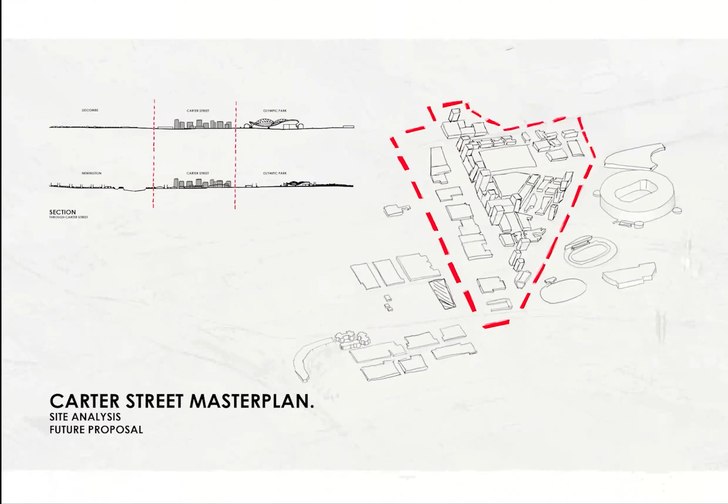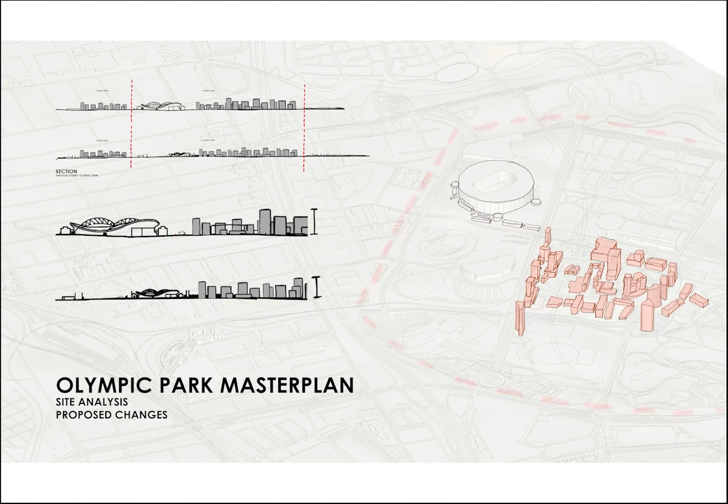Plans for Lidcombe's development cover an area of private residential growth as well as diversification into high technology manufacturing. Carter Precinct, however, focuses more on high-density, high-rise residential, breaking the form factor and level changes to Lidcombe. Olympic Park's repeating vernacular in high-rises further creates a rift between the three precincts as boundaries are formed. Lidcombe's typology to Olympic Park demonstrates a transition between two fundamentally different experiences.

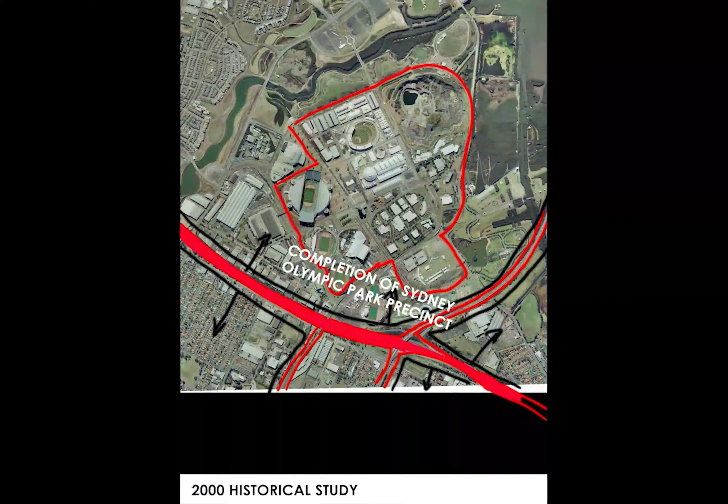Across the last 100 years, the WestConnex construction has been a driving force in the disconnect, most prominent between the suburbs. What remains as heritage for both communities documents a disparity in culture and historical use. The households, occupations and age group between precincts vary, with Lidcombe having an aging population compared to Olympic Park.

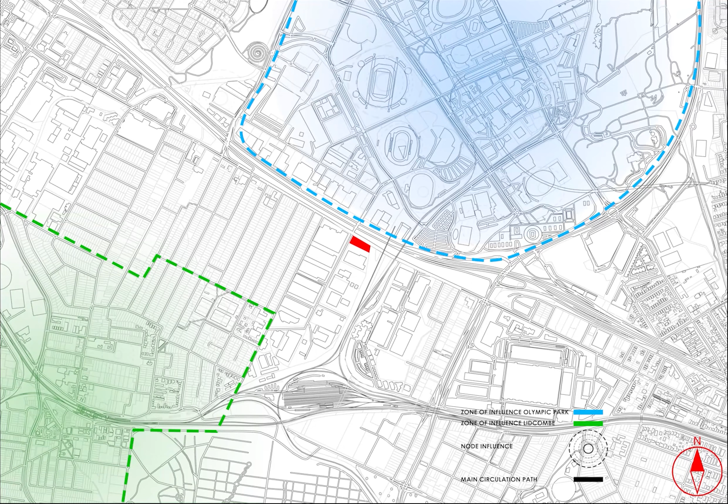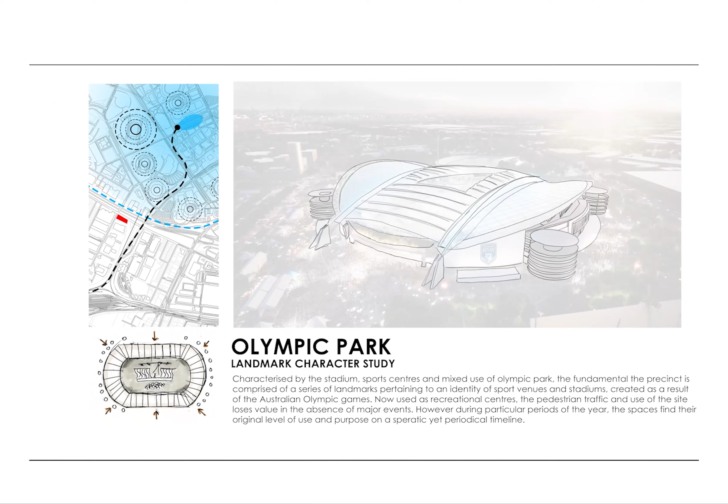Our site is essentially a gateway between two boundaries created by two heavy nodes of circulation and activity. Lidcombe Station is the starting point that funnels circulation from both suburbs it separates. The plans for the revitalised Wyatt M. Phillips Park act as a node of social activity meant to congregate citizens of Lidcombe. Olympic Park Stadium finds varying levels of social activity based on scheduling and events, but altogether is a large place of gathering. In contrast, Olympic Park Station is the ending point of a node that physically affects the site minimally as it disperses circulation around it.

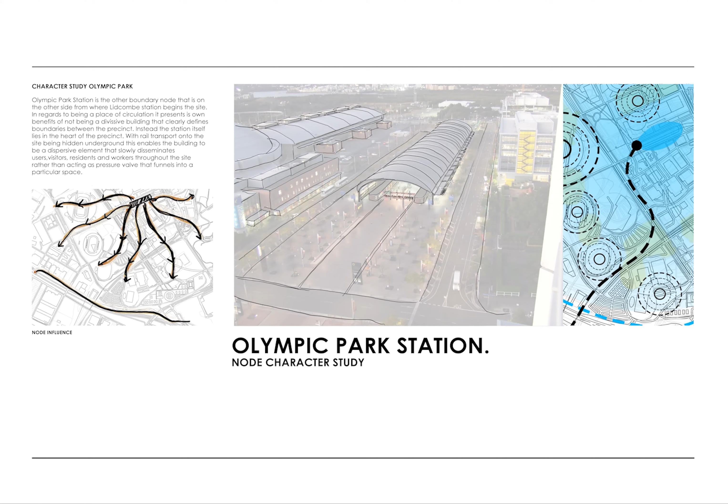The site's issues with boundary conditions are similar to the ICC's public domain interaction with Tumbalong Park. With a circular park space, each building must adhere their facing facades with a greater purpose of creating a gateway between the boundaries of two highly populated high-rise areas.

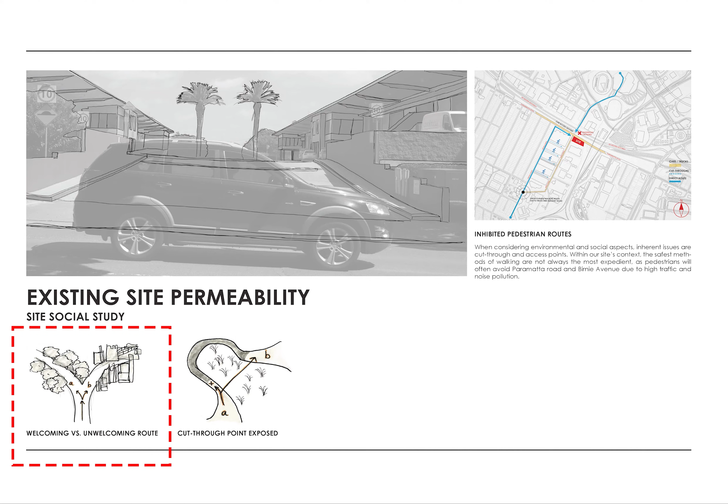When considering environmental and social aspects, inherent issues are cut through and access points. Within our site's context, the safest methods of walking are not always the most expedient, as pedestrians will often avoid Parramatta Road and Birnie Avenue due to high traffic and noise pollution. Such issues create a problem which may result in people avoiding the site altogether. Instead, the opening of the Pippita Rail Trail, combined with the proposed bike path through Bachell Avenue, will offer pedestrians and cyclists a safe and expedient gateway in accessing the site.

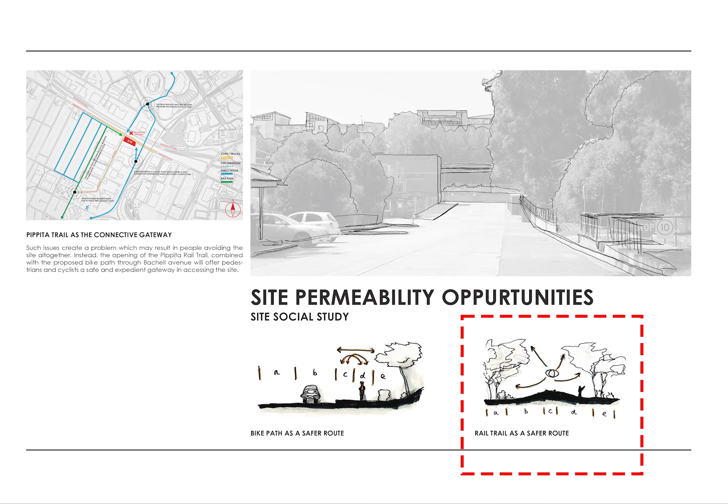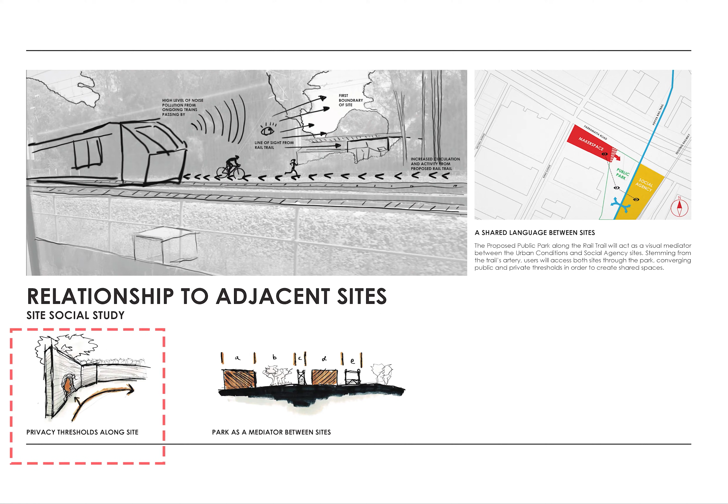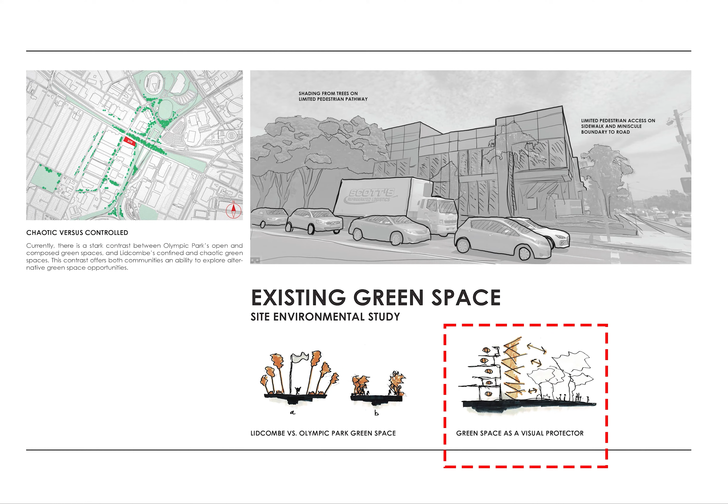The proposed public park along the rail trail will act as a visual mediator between the urban conditions and social agency sites. Stemming from the trail's artery, users will access both sites through the park, converging public and private thresholds in order to create shared spaces. Currently, there is a stark contrast between Olympic Park's open and composed green spaces and Lidcombe's confined and chaotic green spaces. This contrast offers both communities an ability to explore alternative green space opportunities.

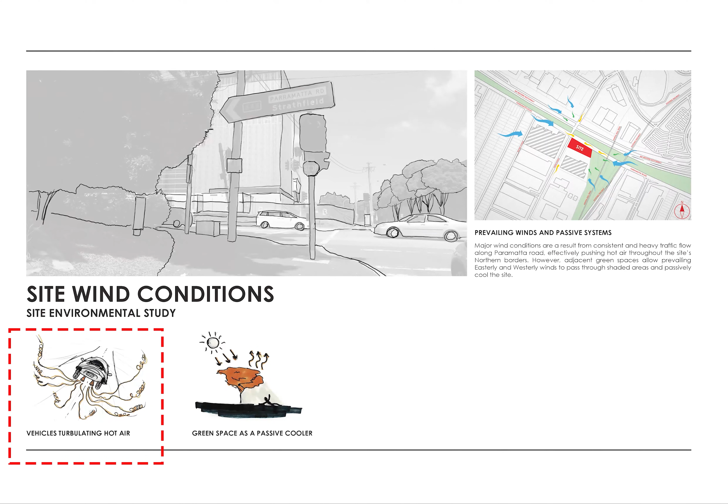Major wind conditions are a result of consistent and heavy traffic flow along Parramatta Road, effectively pushing hot air throughout the site's northern borders. However, adjacent green spaces allow prevailing easterly and westerly winds to pass through shaded areas and passively cool the site. Sitting at the corner of Parramatta Road, our site is surrounded by an onslaught of motor vehicles exhaling fumes and noise as they pass by, inhibiting pedestrians from resting. The adjacent green space aids in deflecting noise from the M4, yet offers little protection in addressing the exposed north and west conditions.

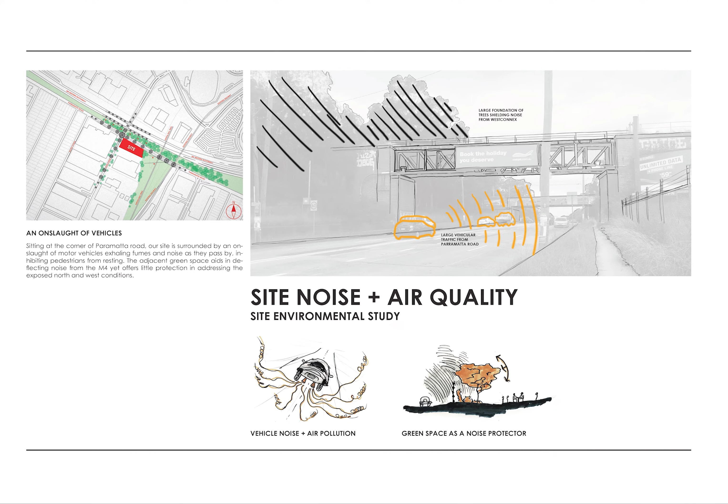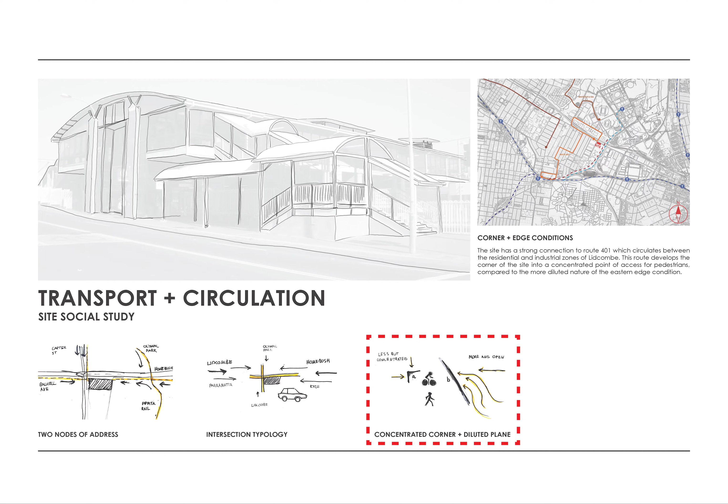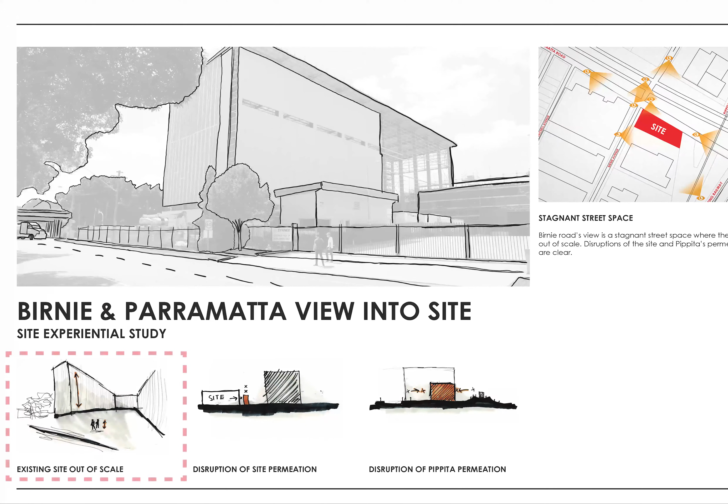Birnie Road's view is a stagnant street space where the site is out of scale. Disruptions of the site and Pippita's permeation are clear. Turning around, Olympic Park's site intersection rounds the bend to display a broken reveal of the site. Thresholds are terminated and there is the clutter of the vehicular space.

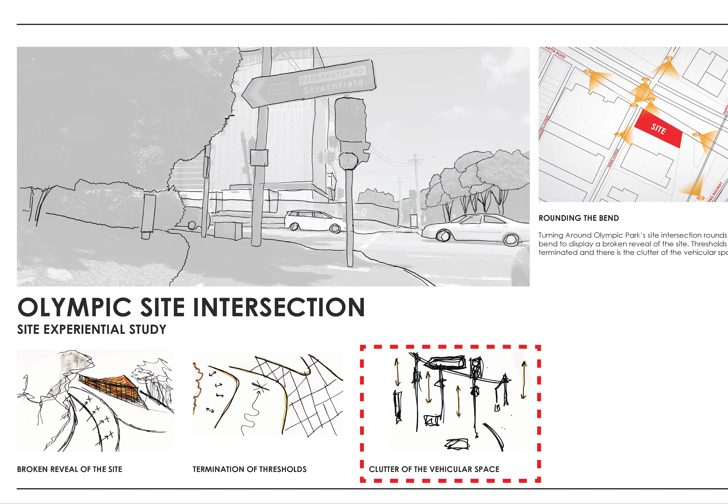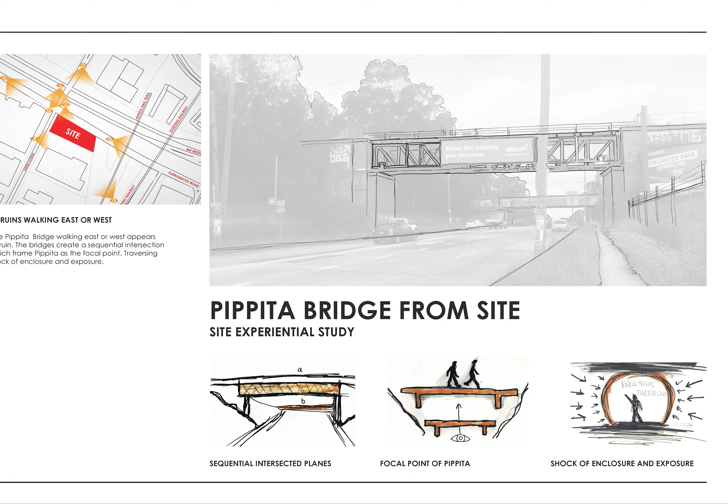To the west, Lidcombe's bus route grounds one with a hint of the site. The diagonal M4 berm contrasts against the vertical built form. Eastward, the Pippita Bridge, walking east or west, appears an industrial ruin. The bridges create a sequential intersection of planes which frame Pippita as the focal point. In between these, the corner overlooking Parramatta frames the M4 bridge as a growing skyline gateway with a primitive hut form. It is seen from varied viewpoints.

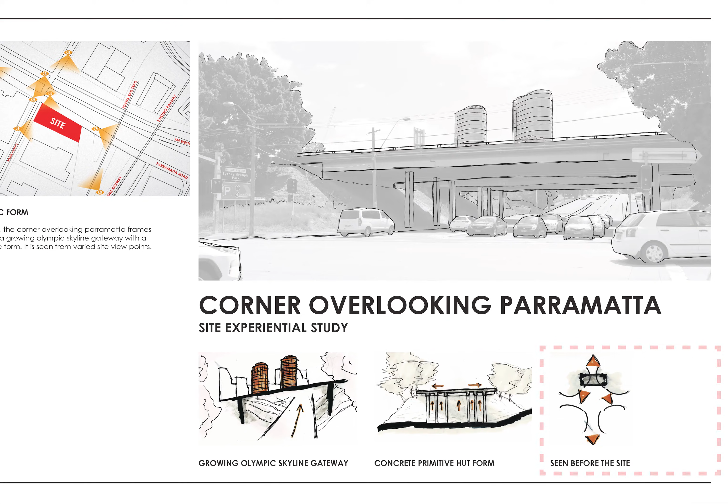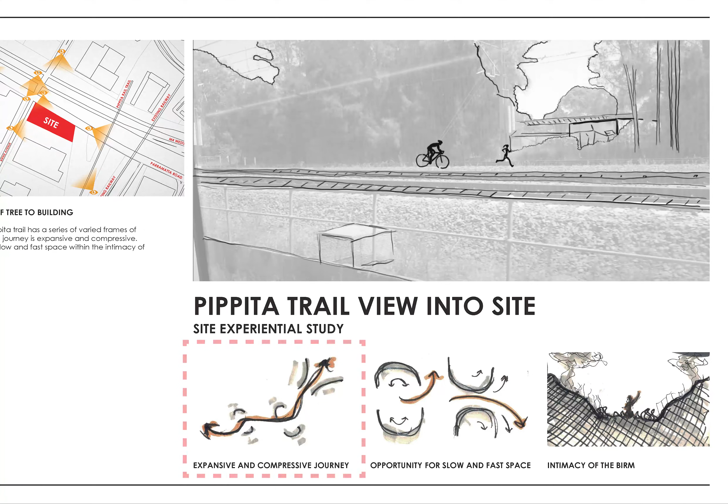Stepping back, landscape thresholds continue under the M4 bridge. The intersection of ground planes is distinct, as is the horizontal form that denotes the gateway. Upwards, the M4 has a passing view of the site between the tree canopy. Briefly expansive, overlapping cuboid massings complement the shelter of linear street trees. Back southward, the Pippita Trail has a series of varied frames of tree to building. The journey is expansive and compressive, an opportunity for slow and fast space within the intimacy of the berm.

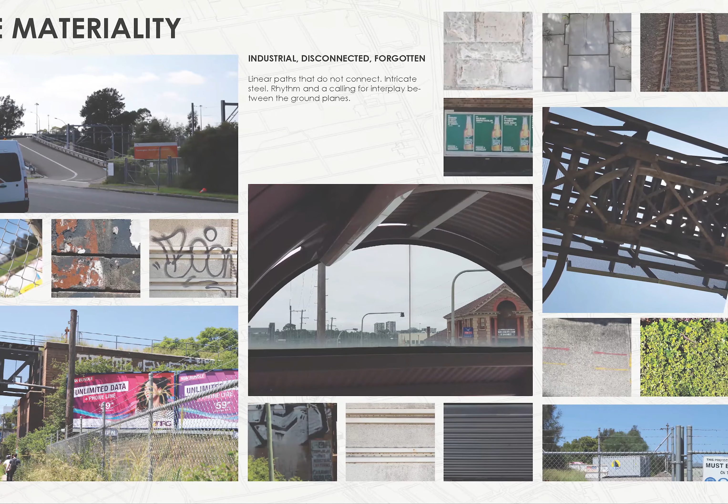Industrial, disconnected, forgotten, linear paths that do not connect, intricate steel, rhythm, and a calling for interplay between the ground planes.